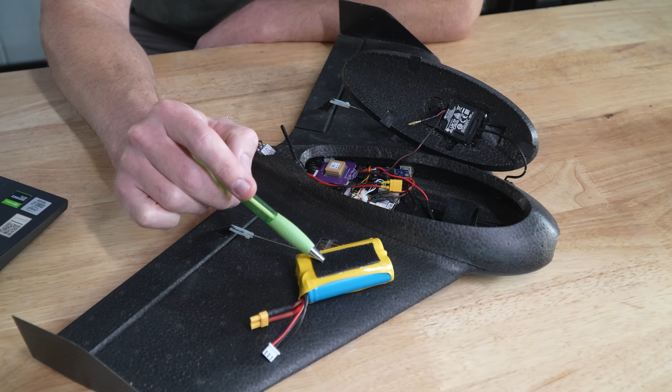With a 2-cell 18650 battery and the DJI O3 unit running, at max, you're gonna get about 40 minutes of flight time. By the time you hit about 40 minutes, you probably won't even be able to climb the airplane anymore. So that really is kind of the limit with that.

If I were to remove this antenna, the drag from this antenna, and turn off the DJI Air unit, you're actually gonna get about 70 minutes. So it turns out that the Air unit is almost pulling as much power as the motor and all the other electronics in the plane itself when it's flying. This thing is a huge energy hog. But that's on a 2-cell setup.

The cruising speed for this guy is about 14 meters per second, like 31-ish miles an hour. And it handles really well.

A lot of people have wanted to know what the difference between this and say the Nano Goblin is, which I also designed. It's a little bit smaller, but as you can see, the plan form is different - we have a swept wing instead of a straight wing. So how does that translate to how it flies? This plane will be able to get into tighter spaces than the Nano Goblin. The Nano Goblin really has a hard time getting the nose up and slowing down. This one you can slow down. They're both really high performance, and the way I think of this one is more of like a rally car, and the Nano Goblin is more of an F1 car. So both very high performance, but very different.

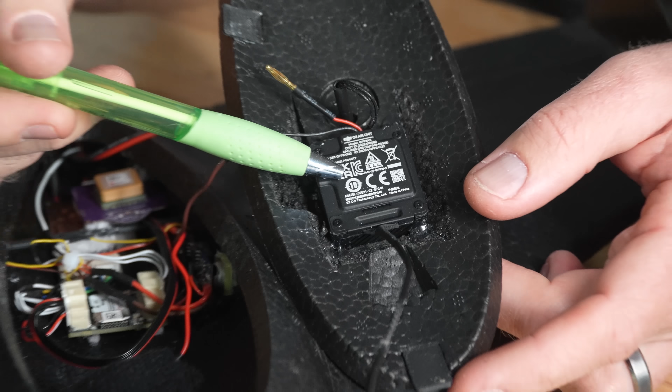Okay, so here's the full setup that I'm running. The camera for the Air unit goes in the nose up here, and then I have the Air unit itself in the canopy, and you can see the lengths I've gone to get cooling around this thing - it gets hot fast. I also have a separate plug here so that after the autopilot has booted, I have a satellite lock and everything, I can plug the Air unit in at the last second and then go. That way the Air unit isn't sitting on the ground heating up and I don't lose it in flight.

I'm using a mRobotics Control Zero H7. That's probably the part that most people will disagree with me on. When I was trying to run less expensive autopilots, I ended up losing a lot of equipment and having a lot of frustration and losing a lot of time.

I went to the MRO Control Zero, which I've used for a long time, and pretty much all my problems went away. Using an MRO GPS, this is a lightened DragonLink receiver transmitter. I'm getting telemetry from the plane out quite a ways, full telemetry.

Then we have our Emax flight electronics, so Emax motor. This is an 1106. We may be a little underpowered. We're still kind of deciding whether we want to upgrade that to like an 1108 or something. And then we have a little 20 amp ESC and Emax digital servos.

I have my little Castle Creations BEC, which I've lightened up to power everything except for the telemetry transmitter, which powers directly off the 2-cell battery here. This is a Molicel M35A, I believe. This one can put out about 10 amps max continuous, but it gives me a lot more flight time than say a P26A Molicel. The compromise is that it just can't put out as many amps as fast.

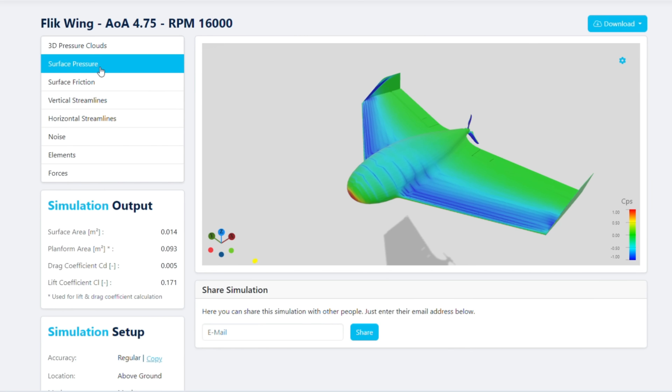An interesting addendum to all this was talking to Wouter from AirShaper, who runs an online CFD service. Being a commercial product that was already finalized in molds, it didn't make the most sense, other than I was just so curious to see what could be gleaned from higher order analysis. I pulled the trigger and ordered some server time, and included parts of the overview that make me look like I sorta know what I'm doing. Also, it might be that this is not as problematic as it looks.

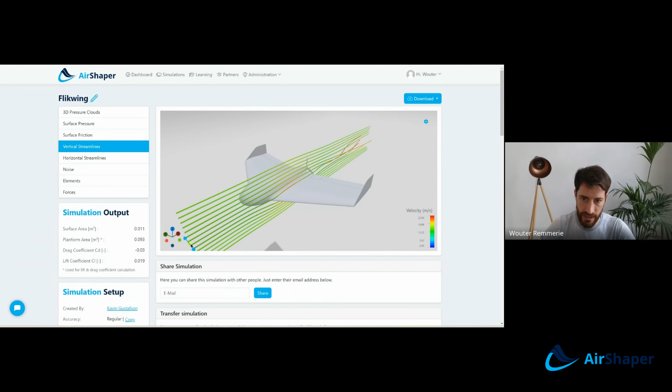We have an arbitrary value of 0 for the total pressure to indicate whether you have energy loss or not. If I change this value just slightly, it might be that this disappears while other areas are still visible. So what you can also do is look at the streamlines to see if there's any swirls locally, but I think it's fairly attached flow. I don't see any separation there. This is all nice. So if I look at this one, I don't see any flow separation yet, and also not on the surface. So it might be that it is just actually okay, and you don't need to do anything.

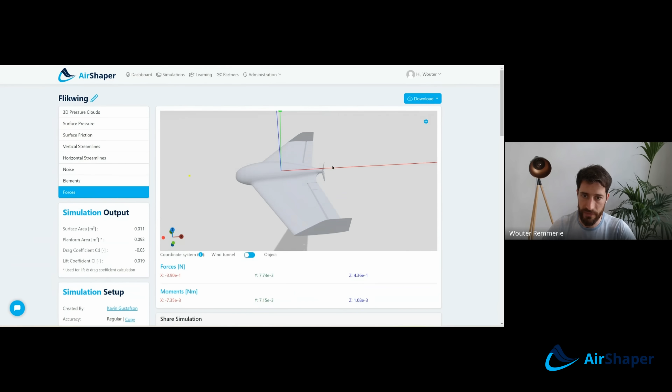Then the other question is, if you look at the lift over drag ratio, which is a good indication of efficiency, this one is going flat. So let's take the one at 4.75 degrees. It's tricky to judge the lift over drag ratio because we have the prop in the model, right? So we have an almost negative drag, so you'll have a huge lift over drag ratio, which is not fair. It's 4 divided by 0.2, that's 20, which is not the case.

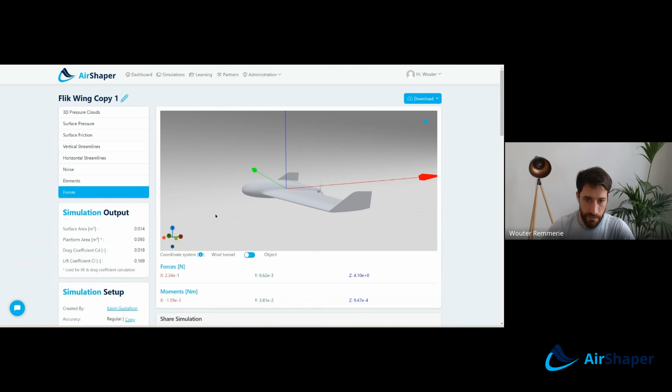What you could do as an indication, it's not entirely correct, but if you click on the body surface, you get 4.08 newtons of lift divided by this one, which is 0.427, which would be a lift over drag ratio of 9.6, which is actually quite okay for your design.

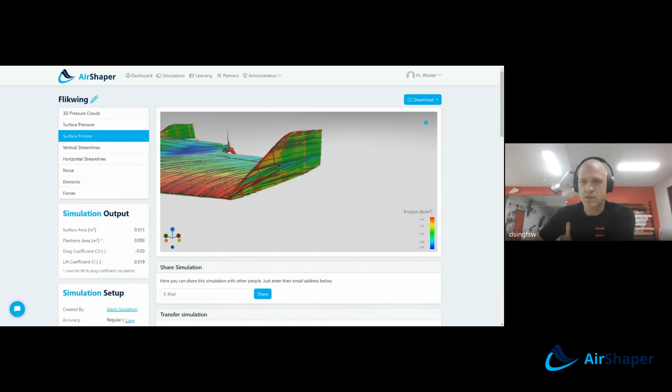But with the vortex, that interior vortex coming off the wingtips, my thought was the solution I'd come up with in my mind for now, other than molded ones, which I feel would do a lot better keeping the vortex from even separating in the first place, would just be to do half of the winglet on top of the wing and half on the bottom, or like 2/3 on top, 1/3 on bottom. I do want to do the flat plate CNC thing. I think it's a lot easier, a lot more durable, more user friendly, but I do want to reduce that vortex if at all possible.

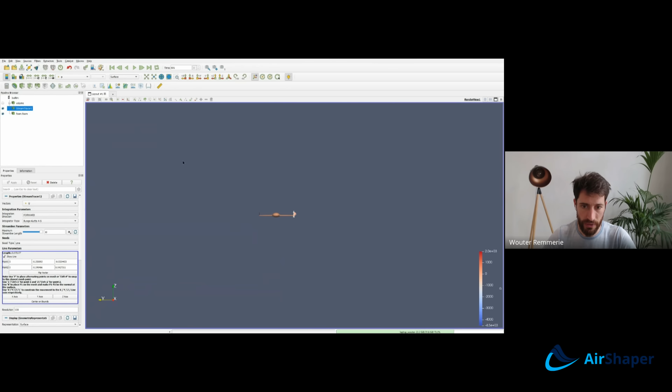So there's already stuff you can deduct from the simulation here, so you can start to see what's happening. There's a big swirl around the top of the wing here, and then more going on the sides. So here you can see the air diving underneath. If you would extend your wingtip to the bottom, I think that would definitely make sense, because you would block this flow going underneath the wing. So that would be a good one.

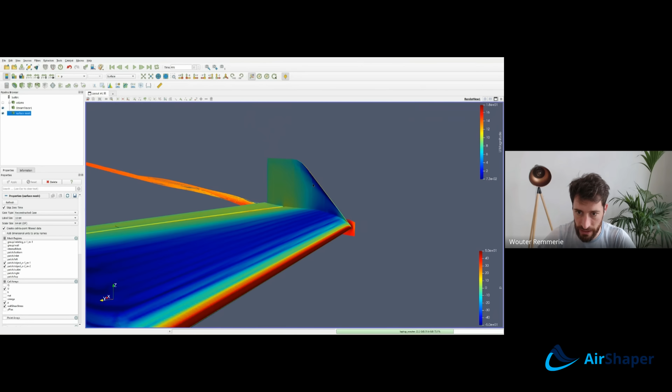This low pressure area is really very active in this area. So maybe you can make your winglet a bit like this, there's a bit more volume here, and then maybe horizontal, and then mirror it down towards the bottom side.

I ended up making winglets that were my interpretation of where the conversation had gone, and they turned out to be essentially identical in efficiency to the existing design, but handling was really squirrely on such a small model, as the effective dihedral of the wing was reduced. On a bigger plane I would love the neutral stability, but on this one it was a little aggressive, even for me.

We'll probably stick with the current winglet design, but with Wouter walking me through the process and seeing potential problem areas that could be addressed beforehand on future products, I realized I'll be using his services a lot more.

A second addendum is that the second batch of samples is in transit for evaluation. If that goes smoothly, then it is time for a production run, and Flix will start shipping as soon as we get them stateside.